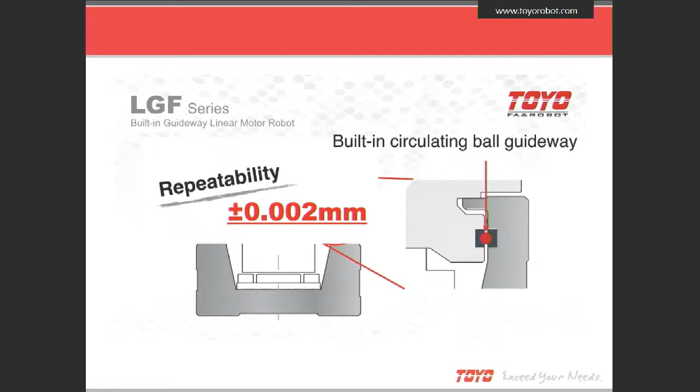Okay, so what are linear motors? If this is a review, please bear with me. Linear motors take the traditional rotary motor and unfurl it. So they untie the ends, or splice it if you will, and then flatten it out. But not only does this unfurl the structure, it also takes the rotational motion and moves this into a linear motion, or the torque, a rotational force, into a thrust, a linear force.

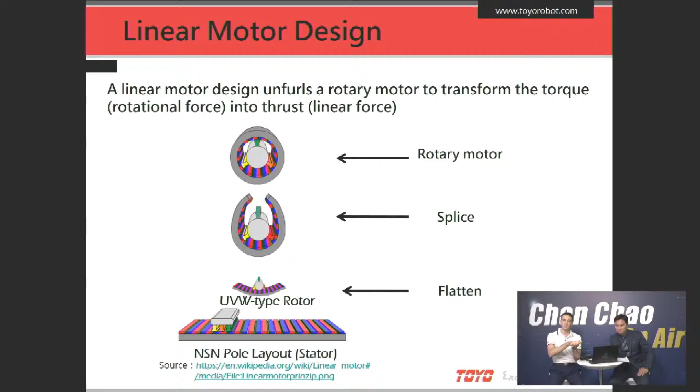Now on the very bottom of the screen, you can see our linear motor with a UVW type rotor. The permanent magnet stator arranges magnets in alternating polarity, which gives a north-south pole configuration. And you may be asking, what are the benefits of a linear motor? Well, most linear actuators take a rotary motor that uses torque and then translates that into thrust. Linear motors avoid using a drive mechanism. We can directly place the load on top of the rotor to provide thrust and linear motion.

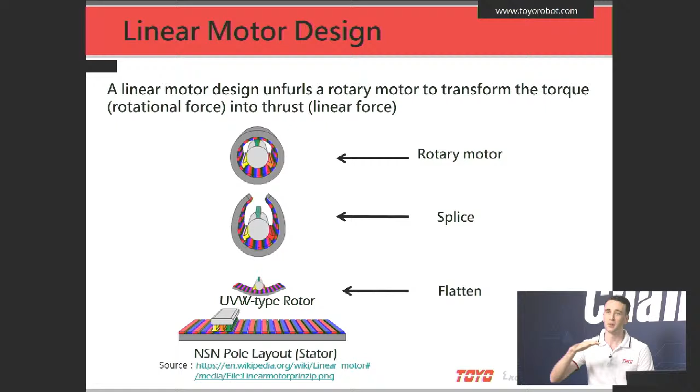Okay, so you were probably wondering, what do our linear motors look like? Well, they actually look very similar to our ETH series ball screw and ETB belt drive series. Now, you can see here that we have linear guideways along the stroke of the module.

Then inside we have the stator, which has permanent magnets in that alternating N-S, N-S arrangement. Then we can see on the very right here the solenoid and table. The table has the solenoid, and then it has a table on top that places the load. Now these red arrows indicate the direction of travel and also the direction of thrust.

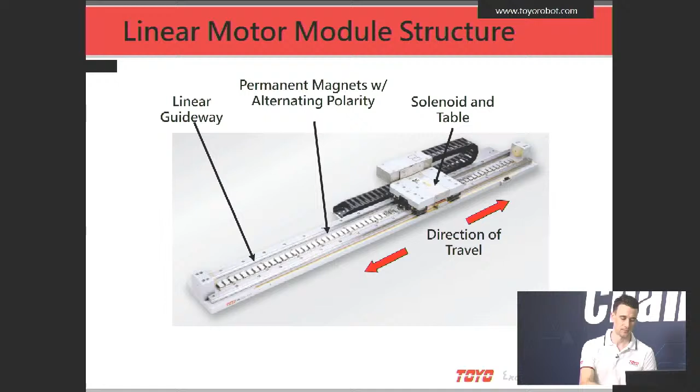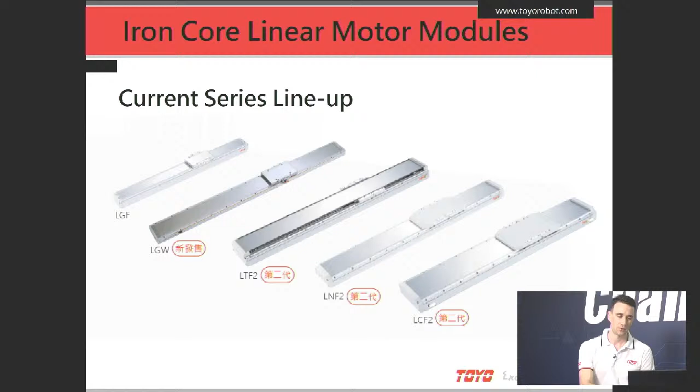Okay, so we split our linear motor series into two types, iron core and ironless coil. Now for our iron core series, the left two modules, the LGF and LGW series, have our built-in linear guideways. Now on the right is the second generation of our standard guideways series, the LTF2, which is an open body type, and LNF2, which is a closed body type, and then an LCF2, which is a clean room rated class 10 type linear motor.

Now, what about the ironless coil? Well, the two series on the left are a U body type, the LAU, and then the LMR is a rod style for those rod style applications.

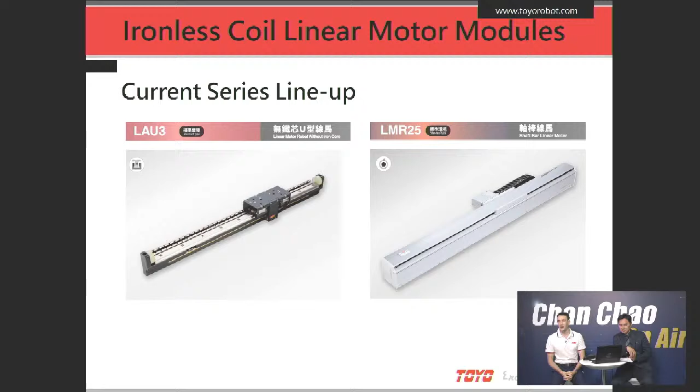Okay, so what is the difference between an iron core and an ironless coil linear motor, and when should I use them? Well, an iron core linear motor has an iron core inside the coil. Now, this interacts with the permanent magnets in the stator, and that actually gives a cogging, a sort of start-stop. This contributes to the speed variability, which can reach up to 5%. Also, the heavy weight slows down the response of the linear motor, so subsequently the acceleration is slower than the ironless type. But for the thrust, the iron core provides much higher magnetic flux density, which allows for higher thrust.

Now, what about the cost? Well, it may seem like the rotor with the iron core would be a little more expensive, but the overall module uses fewer permanent magnets, which decreases the overall cost of the unit.

Now, for our ironless coil type motors, we sort of have the opposite. Without an iron core, the rotor doesn't interact with the permanent magnet stator as much. This means that speed variability can be kept under 1%. Because the rotor is lighter and there's less interaction with the permanent magnet stator, the acceleration and response is very fast, very quick.

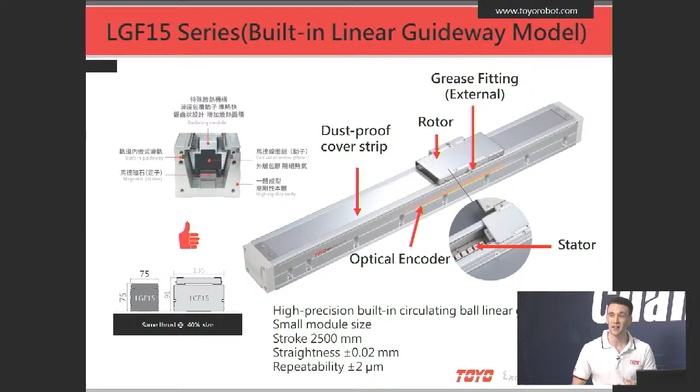If you're fortunate enough to come to one of our shows, we do actually feature our granite body type linear motor modules. Okay. So probably one of the questions: how do you control this module? What type of encoder does TOYO use for this linear motor module? Okay, yeah, that's a great question. So the encoders come in two types. We provide TOYO's magnetic encoder, and then we provide Renishaw optical encoders. Now the Renishaw optical encoder, we can select a 1 micron, a 0.5 micron, and a 0.1 micron optical encoder.

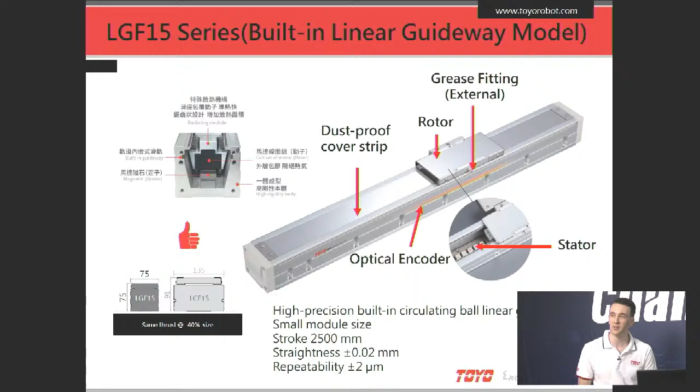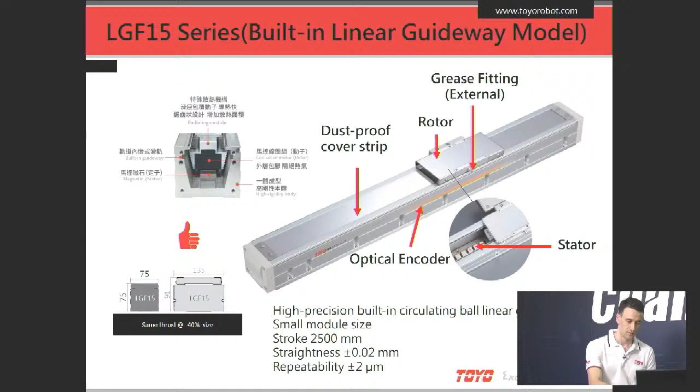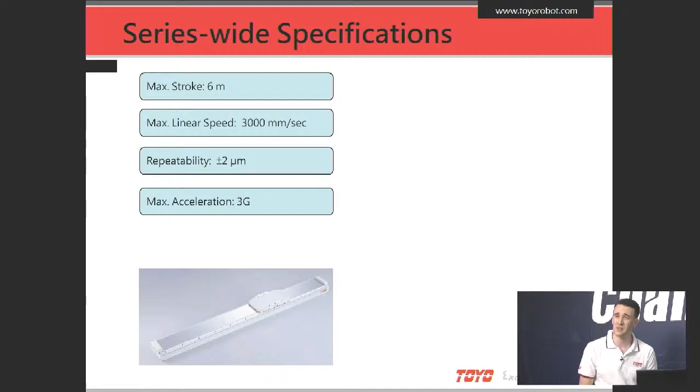Okay. And also some of the big specs on this LGF15: the stroke reaches 2.5 meters, it has a straightness of 0.02 of a millimeter, or 20 microns over the stroke, and features a repeatability of plus or minus 2 microns. So these are sort of our series-wide specifications. The longest stroke that we can feature is 6 meters. You can reach speeds of up to 3 meters per second, or 3,000 millimeters per second. You have a repeatability of plus or minus 2 microns, maximum acceleration of 3G, and a maximum payload of 120 kilograms.

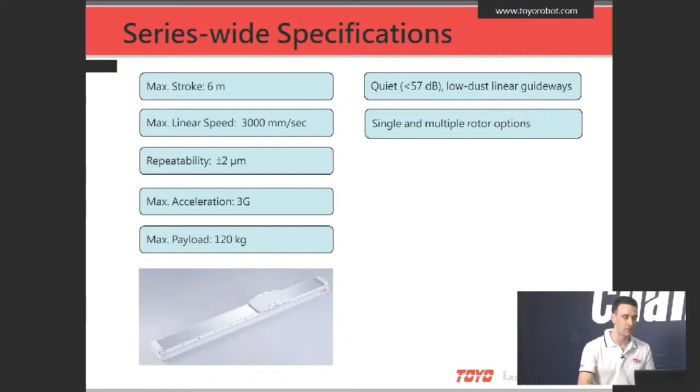Now, for our standard linear guideways, we use quiet, less than 57 decibel guideways, and they're low dust producing. Yes. Single and multiple rotor options. The rotors are only limited by the stroke length. So if you can fit the rotor on, we can provide multiple rotor options. Okay, again, with that LGF15, we do feature models that are significantly smaller than similarly thrust-rated models on the market. The external grease fitting, that's a patented design. Easy maintenance. And our linear motors are compatible with all major driver brands, including Mitsubishi, Servotronix, and more.

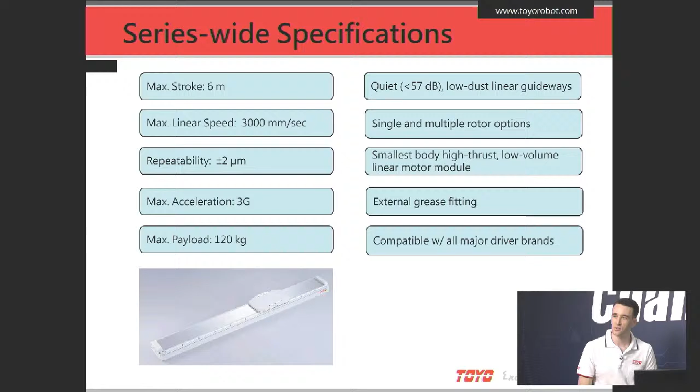Okay, so before I jump in, I'd like to share with you some of our applications. Some of our customers were gracious enough to allow us to take pictures and share with you today. These are real applications that we've actually done here in Taiwan. So the first one is an optical inspection machine. This is a gantry style. So we have two linear actuators on the x-axis, and the gantry style has two linear motors on the y-axis. These can move synchronously or asynchronously.

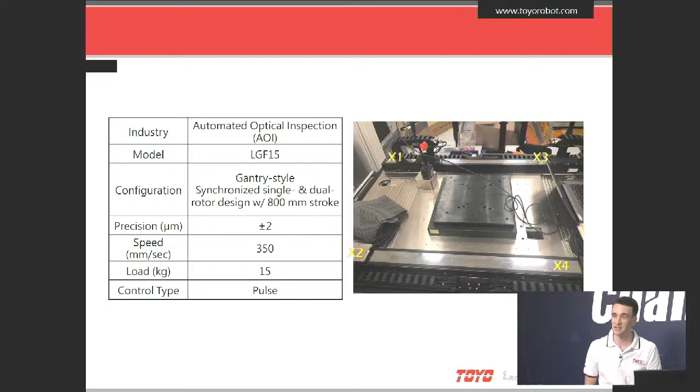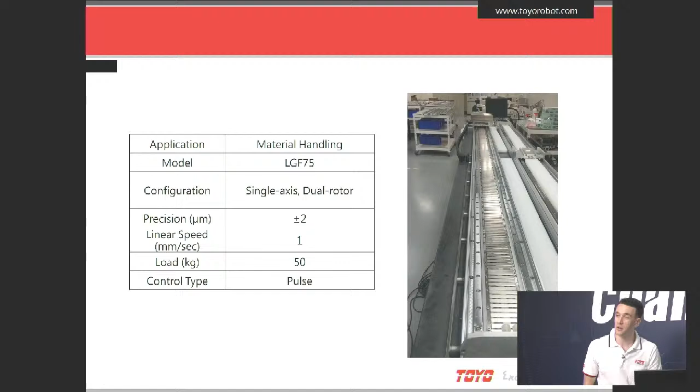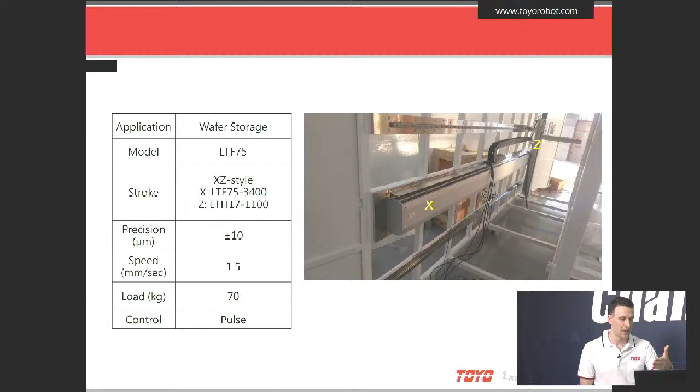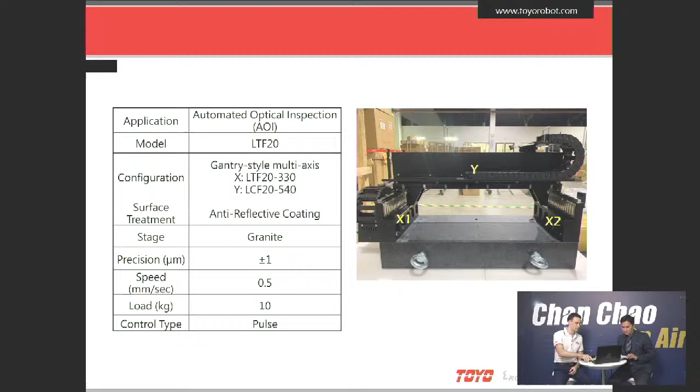Any more questions you would like to ask? Well, I think it's very good. But for the product and the company, do you have any other plans? Are you going to another territory for this product? Yes, we actually are looking to expand in the US and Southeast Asia. We're trying to take our success here in Taiwan, Greater China, and Japan to the rest of the world.